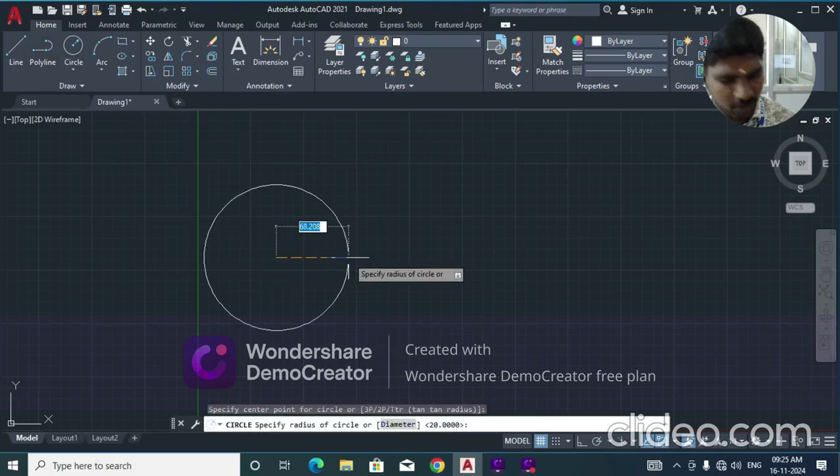First we have to draw a circle of radius 20 mm diameter. So this is the circle of radius 20. Then we have to select the center. By activating the O snap point we can get the center of a circle. So with that we have to draw a straight line.

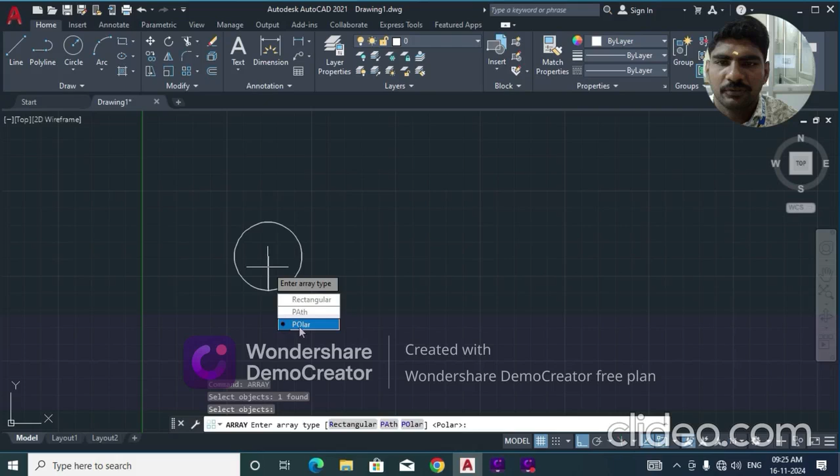Then we have to make it an array, so we have to divide it into 12 segments. We give array, enter, select the object, then enter. For polar array we select polar. Rectangular means it gives a grid, and path means we draw along a path. Polar gives the circular type of arrays.

So identifying the center, then the items can be changed into 12. So we get the circle divided into 12 segments. Now we have to draw the circumference.

So the circumference length is taken as 125.6, so we round it off to 126. So this is the baseline. This 126 is divided, the total circle has been divided into 12 parts, and similarly the circumference has to be divided into 12 parts. So dividing we get 10.5.

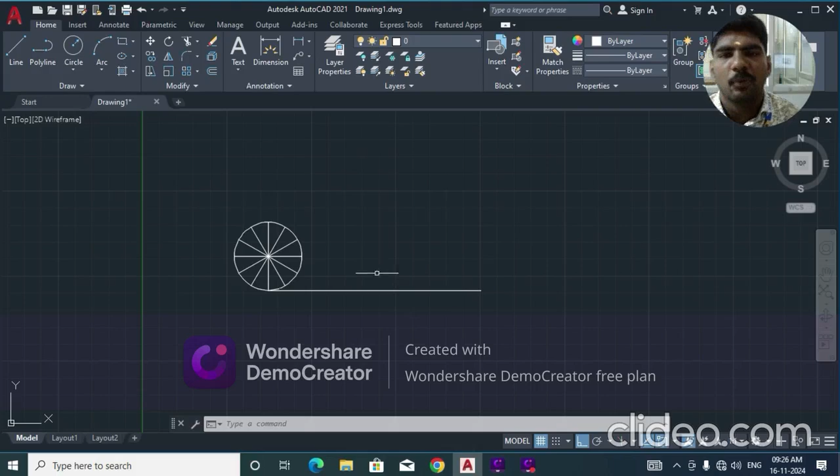So each time we have to multiply these points by 10.5 each point. So from here 10.5, it's 21, then 31.5, 42. Similarly we have to draw a perpendicular line to the axis. So the first line we have to draw from this point, choosing this point center 2, we have to draw a perpendicular line.

So the perpendicular line sometimes gives some approximate white lines. It's around 30 degree. 30 degree, yeah, gives 10.5. We have to recheck it every time.

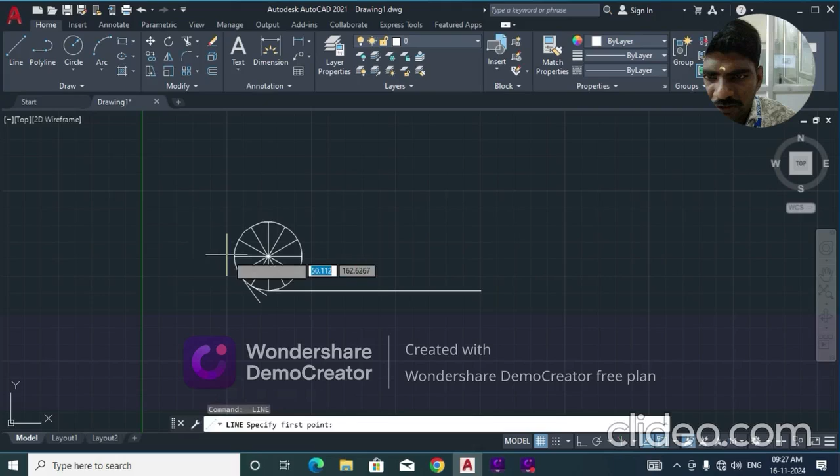So this point from here, it's 21, from here it's 31.5. I have to draw a straight line, so 31.5. From here we have to draw 42, then 52.5, then 63.

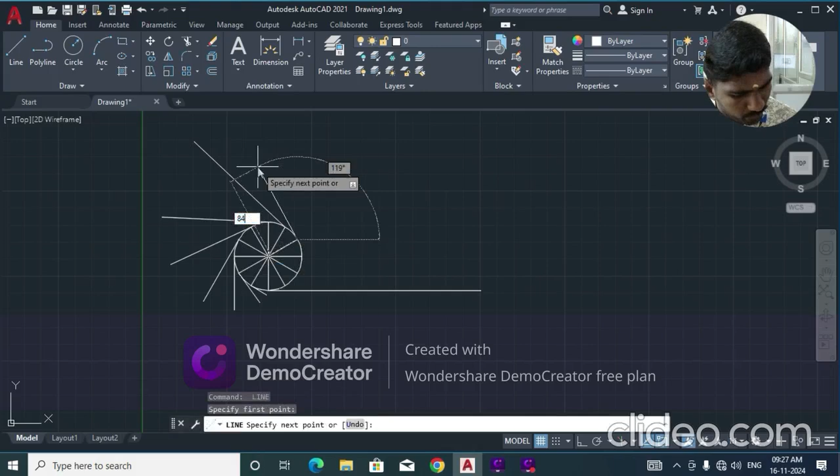So all the lines are not exactly perpendicular, we have to make it perpendicular next time. So it's 73.5, then it's 84, then it's 94.5, then it's 105, and the next thing is 115.5, and the next thing will be 126.

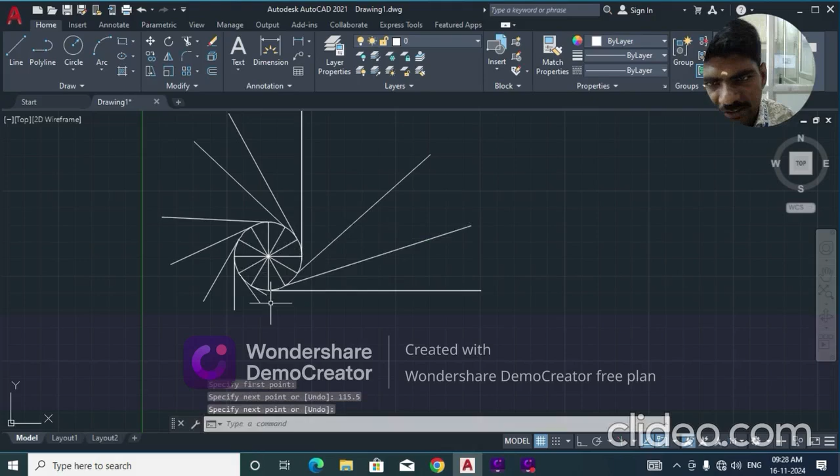So now we have to check whether these lines are perpendicular to these points. For that we have to go for parametric and the perpendicular tool. First we have to choose the first line, the base line, and then the perpendicular line. So these two lines are perpendicular. Space will again repeat this command, so I am repeating it.

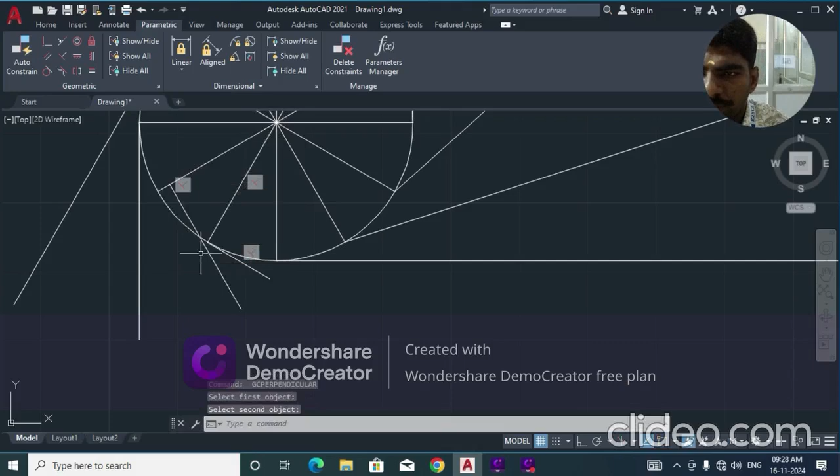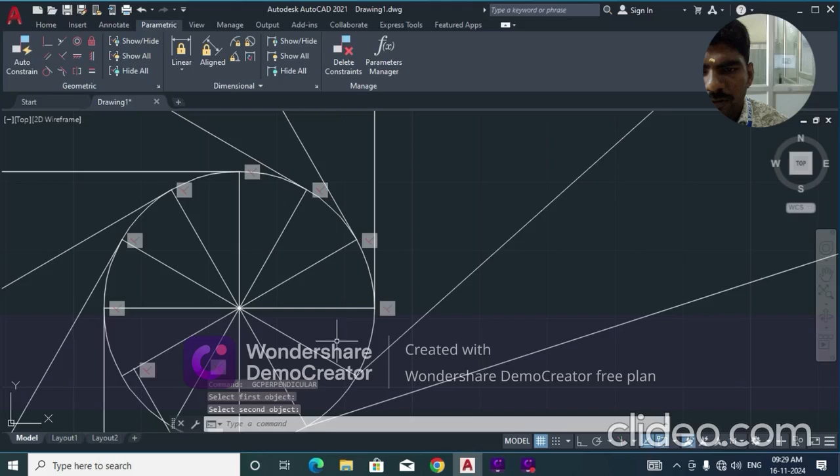Okay, this line we have to move it down. So these two lines are perpendicular. Yeah, these are perpendicular. It has been made perpendicular, it has been moved to perpendicular. Similarly we have to check all the points whether they are perpendicular or not. By changing that we can identify easily the perpendicular lines.

So similarly we have drawn, except this point we have 21. Here also the first 2 points have not been perpendicular, so I am deleting it and redrawing it, so that I can get a clear line. So from this point I am taking reference, and then moving it. So the violet line comes, which gives approximately the 30 degree angle.

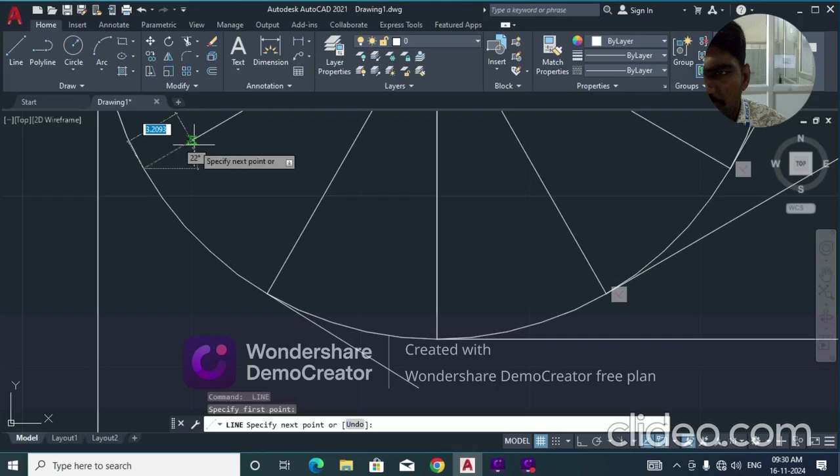Again I am going for 10.5, and from here it's around 21. So again I have to check with the parametric terms. Sometimes these complications might occur, but here it's no problem.

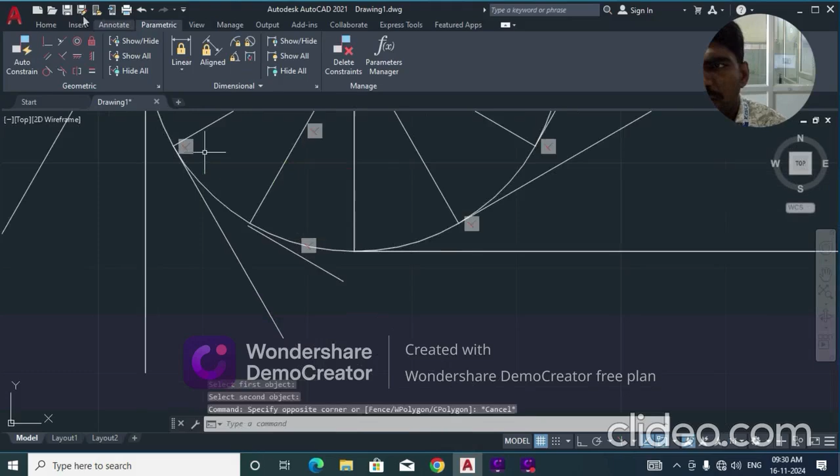So we have to change this point. We just simply move it, so easily we can match the items. I zoom it in as needed. So all the lines have been drawn.

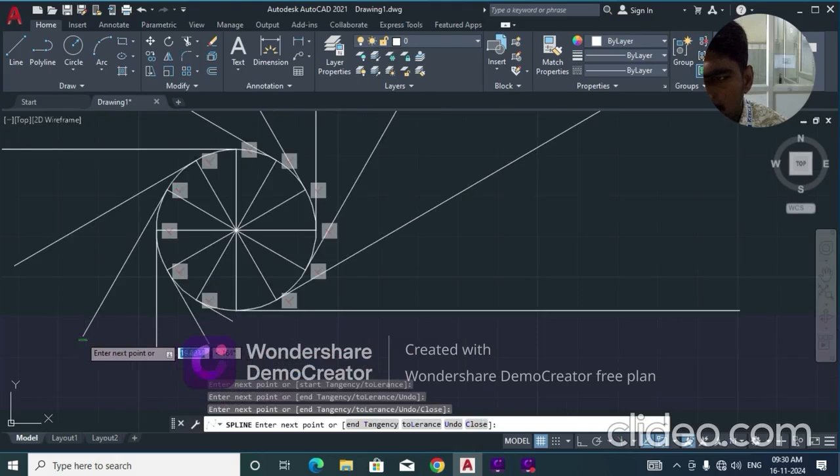So finally we have to merge with this spline command. SPLINE is the spline command, which gives the curve through the points. We have to select all the endpoints of that particular perpendicular lines, then enter. So this is how we draw the involute of a circle.

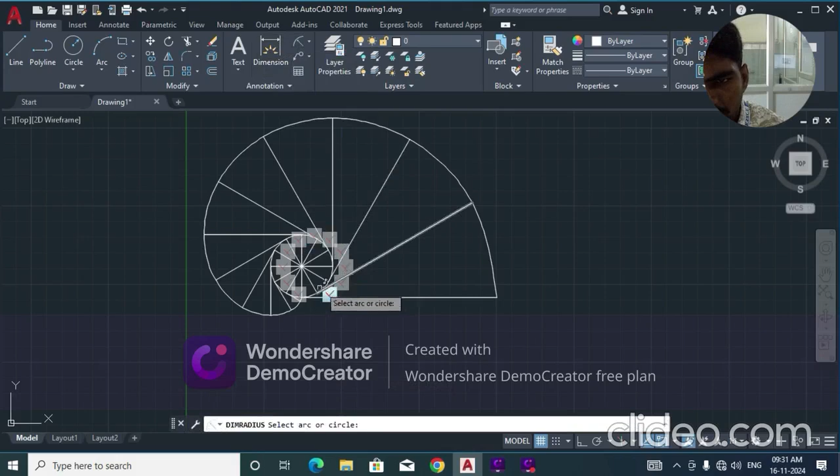So for dimensioning we have to go for radius. So radius of the circle, I am just clicking the circle. Any point we can give. So its radius is 20. We can also measure it.